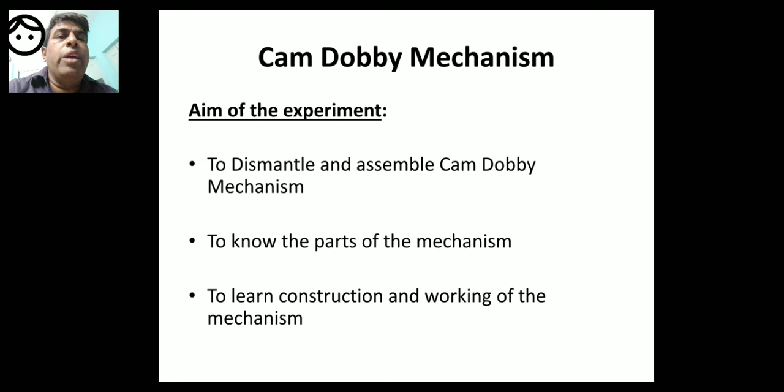So that is known as cam dobby mechanism. Dobby is a shedding device attached to loom to increase the designing capacity. The dobby normally controls 12 to 24 heald shafts. The dobbies are classified as negative, positive, single lift, double lift, crank driven, cam driven, etc.

So in the cam dobby mechanism, dobby is a shedding device attached to a loom, and as I already told, it is attached to the loom, over the loom frame. It is used to increase the designing capacity. The dobby normally controls 12 to 24 heald shafts. The dobbies are classified as negative, positive, single lift, double lift, crank driven, cam driven, etc.

So negative and positive dobbies I have told you already. Climax dobby is a negative dobby where either of the movements, lifting or lowering, is controlled by the dobby, then it is called negative dobby. If both the motions, lifting and lowering, are controlled by the dobby, then it is called positive dobby.

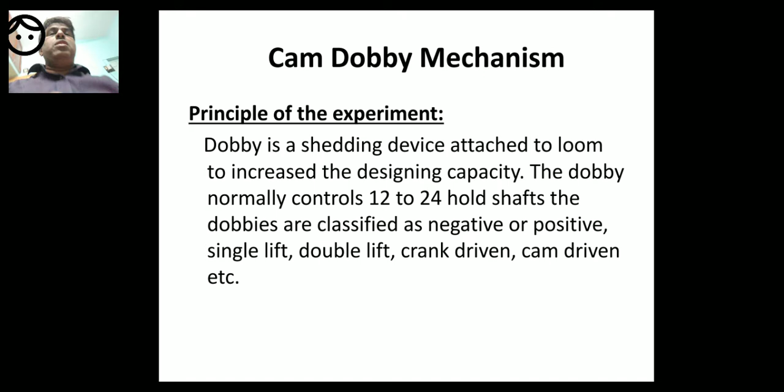Cam driven dobbies are driven by cams, as we are going to see in this diagram. The Ruti cam dobby is negative in action. The healds are lowered because of the spring in this dobby. The knives are pushed forward by the pair of cams. The knives will come back and always stay in contact with the cams because of the spring.

The knives will come back and always in contact with the cams because of the spring. Here dwell of about one third pick is achieved.

The selection of the hook are made by paper pattern instead of wooden pegs. So we have a lot of information in this slide.

The Ruti Cam Dobby is produced by the Ruti company, so it is called as Ruti Cam Dobby. It is negative in action. What does it mean by negative?

The healds are lowered because of the springs in the body, in the dobby. Because of the springs in the dobby, the healds are lowered. That's why it is called as negative in action.

The knives are pushed forward by the pair of cams. So the top knife and bottom knife are pushed forward by the pair of cams. There will be a pair of cams and they will be pushed by the pair of cams. That is another point.

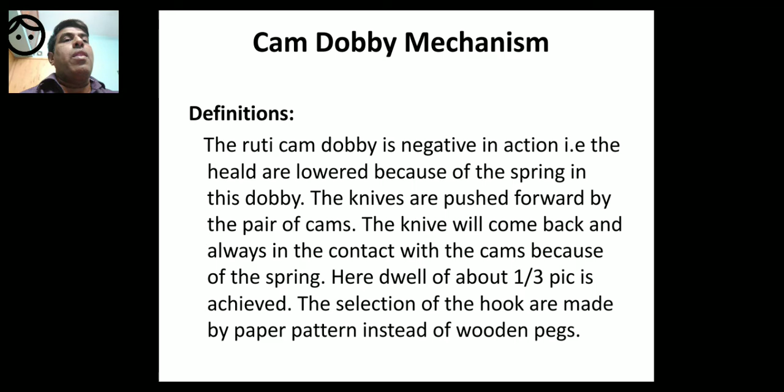So paper pattern is similar in functioning to wooden pegs and lags. So this is cam dobby.

So dear students, please see the diagram. A is the connecting lever, on the right hand side. B is the half lever.

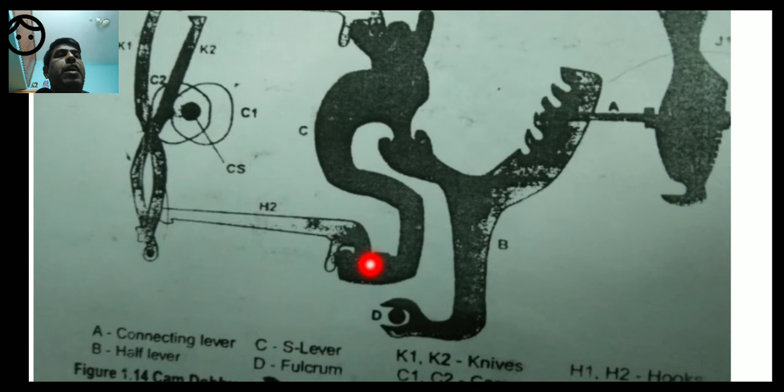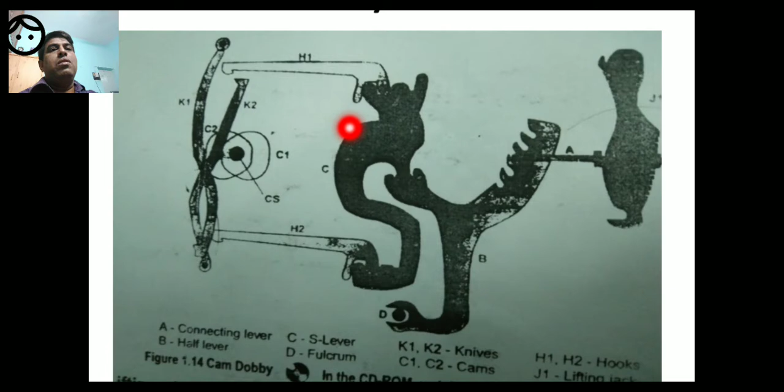C is the S lever. D is the fulcrum. K1, K2 are knives. C1, C2 are cams. H1, H2 are hooks.

This is H1 and the below one is H2, those are hooks, top hook and bottom hook. K1 and K2 are knives.

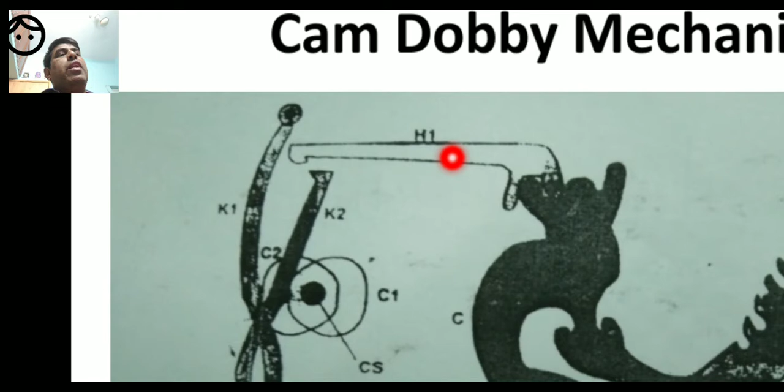So you see the cams, C1 and C2, both of them are cams, connected to bottom shaft. The cams will rotate and actuate the knives, and thereby hooks will come into action, and the motion is transmitted to the S lever and then to the...

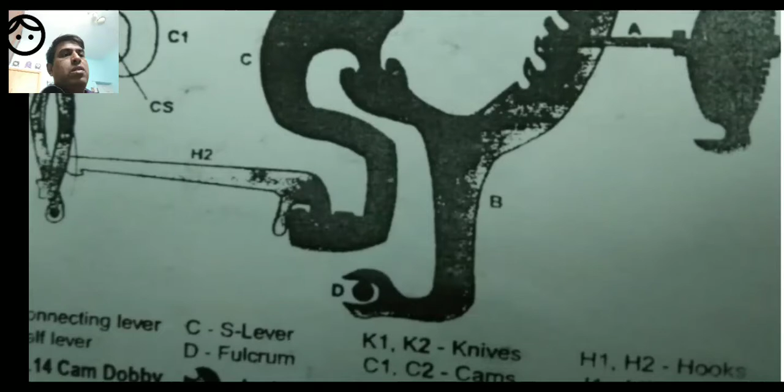What is this? B. So B is the half lever. Here he calls it as a half lever. The author calls it as a half lever.

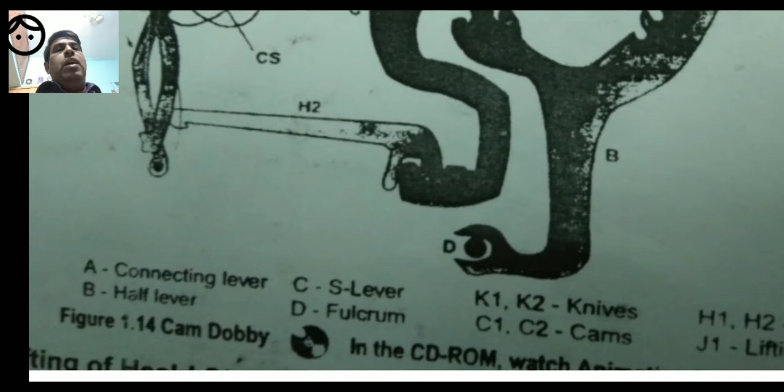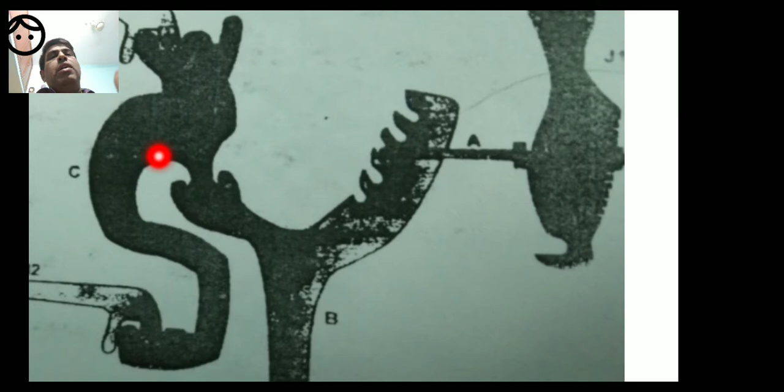So see the parts again. A is the connecting lever, B is the half lever, C is the S lever, and D is the fulcrum. K1, K2 are knives.

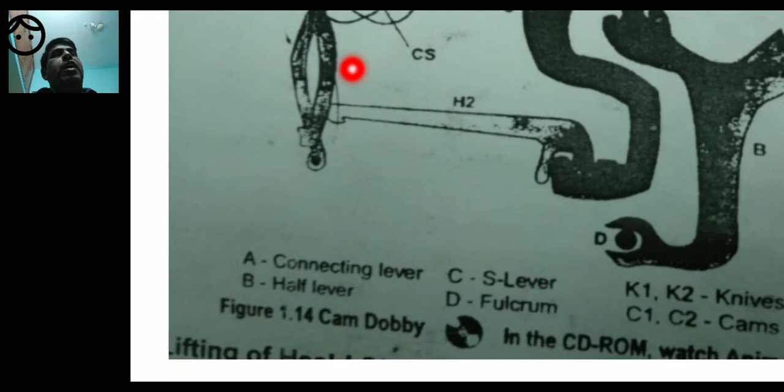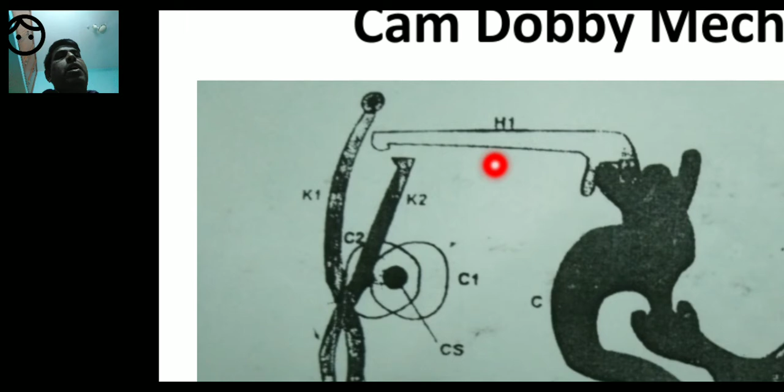C1, C2 are cams. K1, K2 are knives. These C1 and C2 are the two cams. H1 and H2 are two hooks. This is H2. So dear students, these are the parts of the mechanism.

Now we will go to construction of the cam dobby mechanism. Before going to the cam dobby mechanism, I will show you the video. As usual, the video will give you a very good understanding of the mechanism.

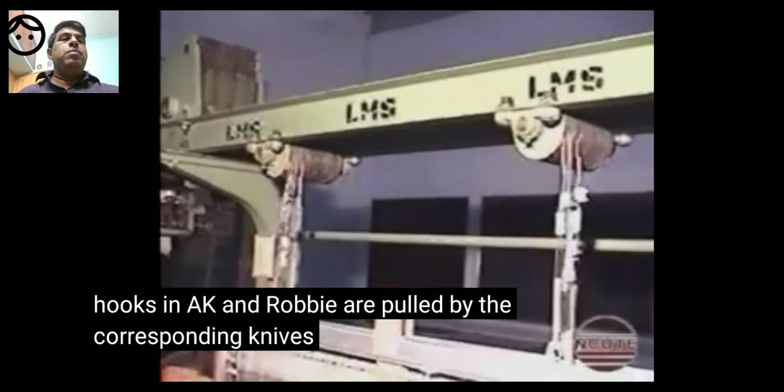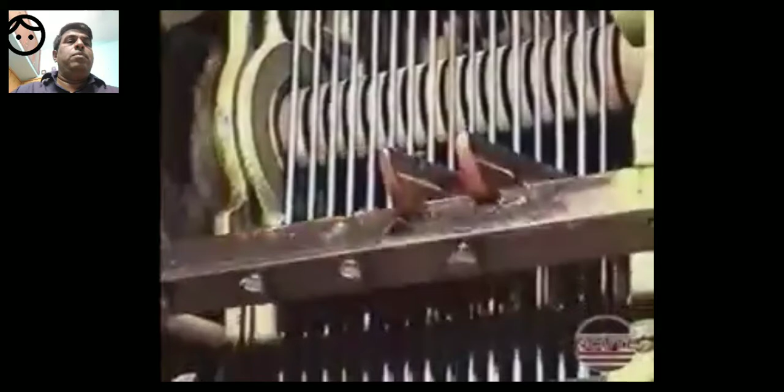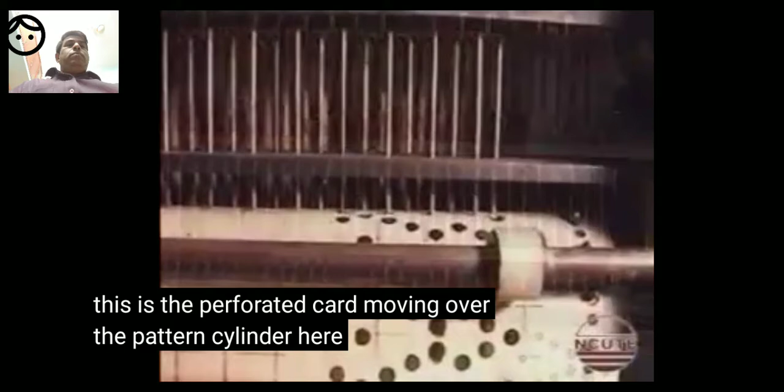In this video, we can see how selected hooks in a cam dobby are pulled by the corresponding knives. These are the top hooks and the top knives, and these are the bottom hooks and the bottom knives. This is the perforated card moving over the pattern cylinder. Here you can see the selection of short feelers and the action of deviating fingers.

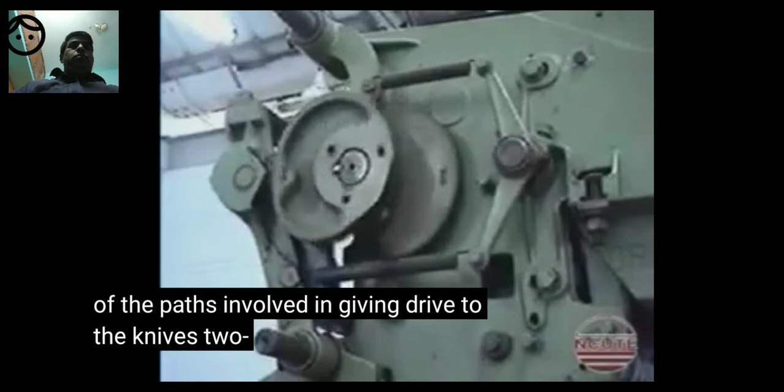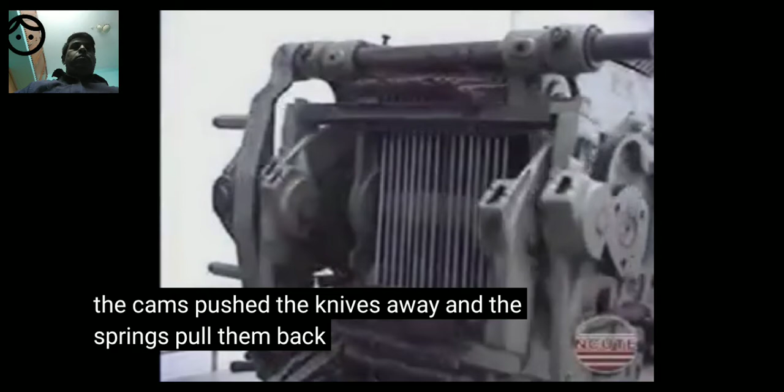This view shows the action of reciprocating lifting blocks. This is a complete view of the parts involved in giving drive to the knives. Two negative cams are seen driving their respective knives. The cams push the knives away and the springs pull them back. Again, we can see here the complete view of the action of the cams, knives, springs, and the pulling of the selected hooks.

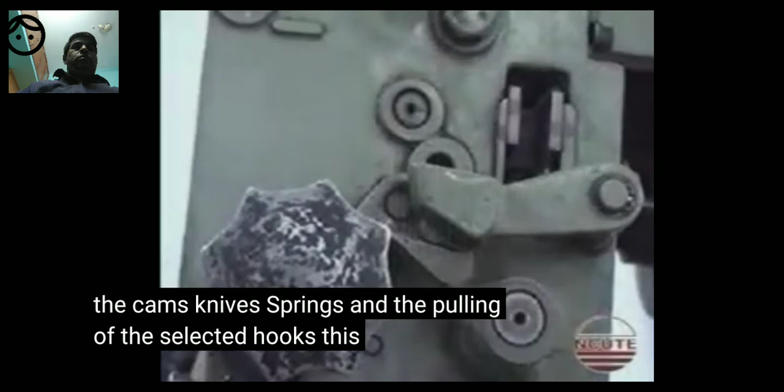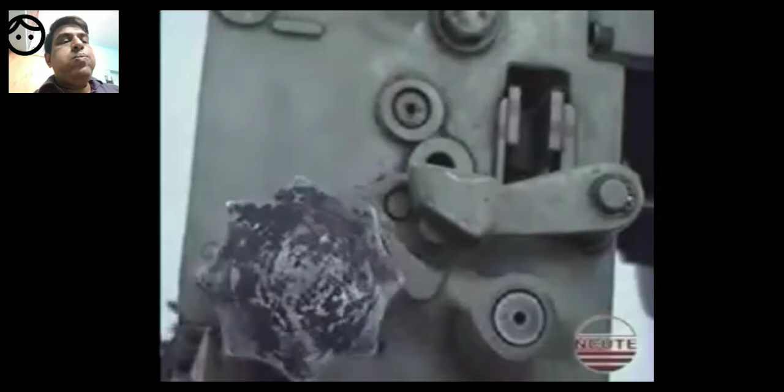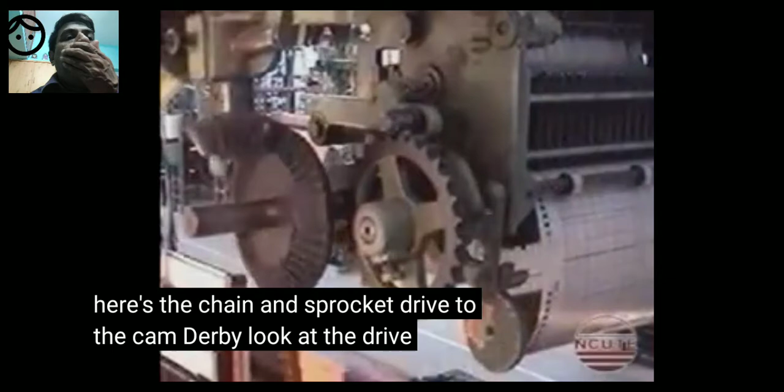This is the drive to the lifting blocks, which transfers the action to the hooks through the upright rods. Here is the chain and sprocket drive to the cam dobby. Look at the drive to the pattern cylinder. See the stud on the cam causing the throw in the sprocket to which the pattern drum is connected.

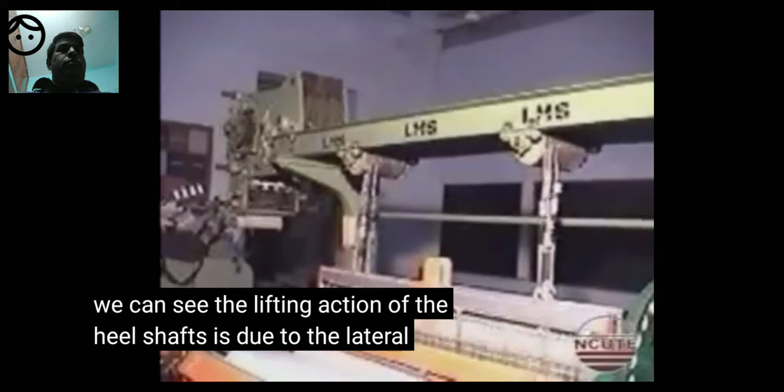Here we can see the lifting action of the heald shafts is due to the lateral movement of the lifting jack. The lowering of the heald shaft is by springs which cannot be seen in this view.

So dear students, you have seen it once. Now I will explain the diagram and the video. Please observe carefully.

In this video, we can see how selected hooks in a cam dobby are pulled by the corresponding knives.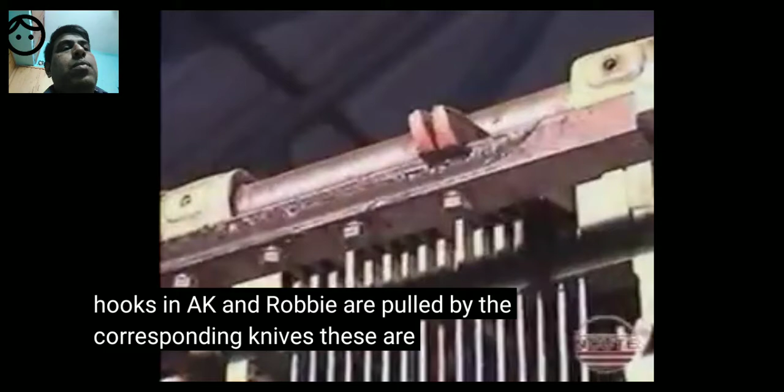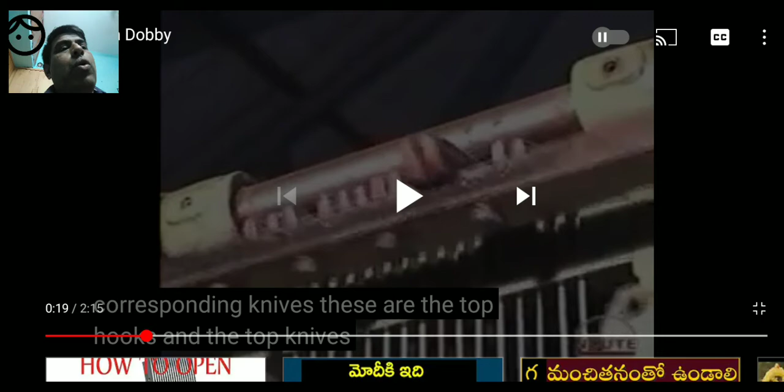These are the top hooks and the top knives. So you see top hooks and top knives above, and below are the bottom hooks. And these are the bottom hooks and bottom knives.

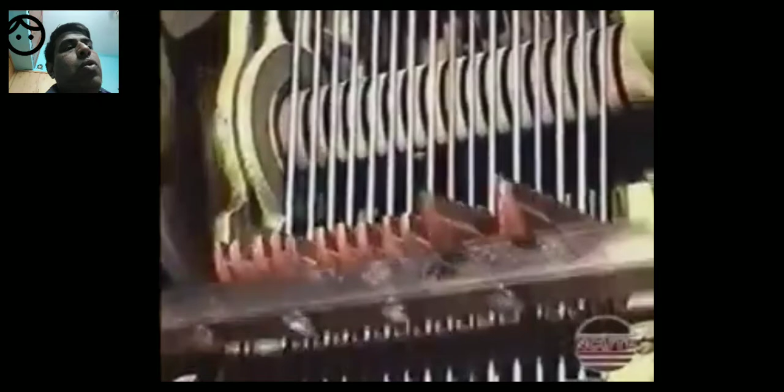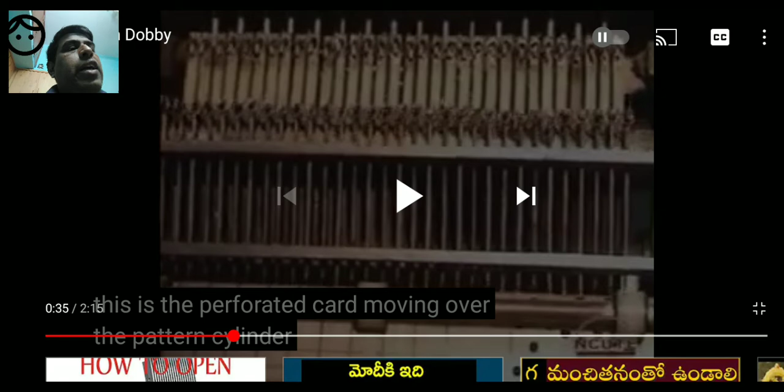This is the perforated card moving over the pattern cylinder. Here you can see the paper pattern, and small holes are present here.

These small holes are akin to pegs, and blank spaces are akin to holes in the wooden lags. So this is the comparison to wooden lags and pegs and holes in the paper pattern.

Simply, dear students, please remember, a peg is similar to a hole. A peg in the wooden lag is similar to a hole in the paper pattern.

So the wooden lags are replaced by the perforated card. Perforations means holes, so that is the perforated card. You can see it on the screen also, moving over the pattern cylinder. A peg in the wooden lag is similar to a hole in the perforated card or paper pattern which runs over the pattern cylinder.

Here you can see the selection of short feelers and the action of deviating fingers. So here you can see the feelers and fingers - there will be straight feeler and bent feeler, and fingers will be there. This view shows the action of reciprocating lifting blocks.

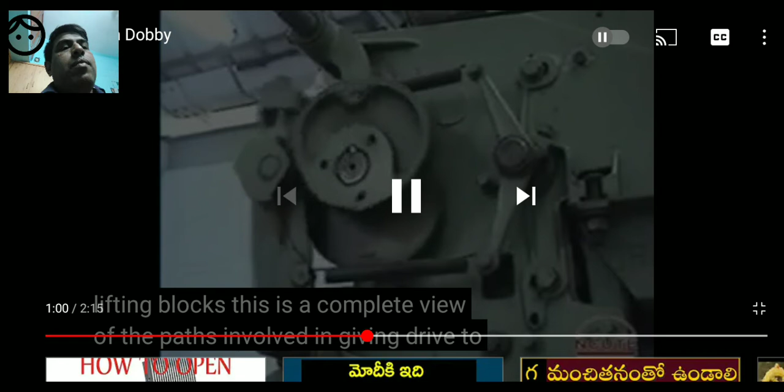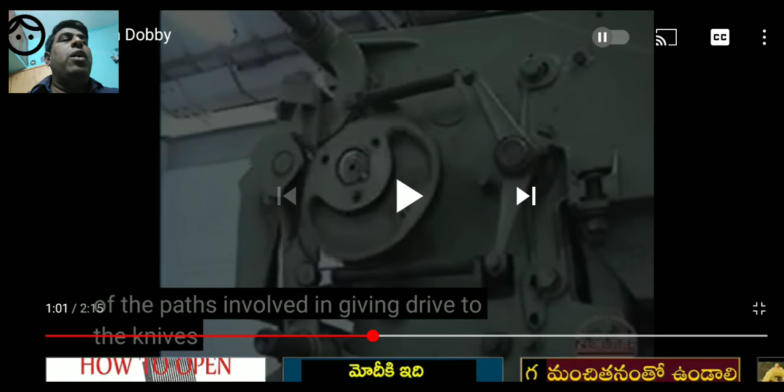Two negative cams are seen driving their respective knives. The cams push the knives away and the springs pull them back. The motion is transmitted to the hooks, then goes to the S lever and baulk lever you will see here, and from this it goes into the machinery parts which we cannot see in the video.

So this is the side view. You can see that there are two cams and two knives, and connected to them are hooks, and they are returned back by springs.

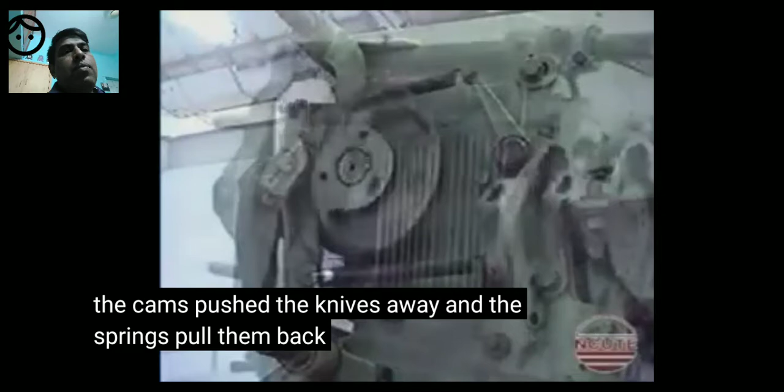Again we can see here the complete view of the action of the cams, knives, springs, and the pulling of the selected hooks. This is the drive to the lifting blocks, pulling of the selected hooks.

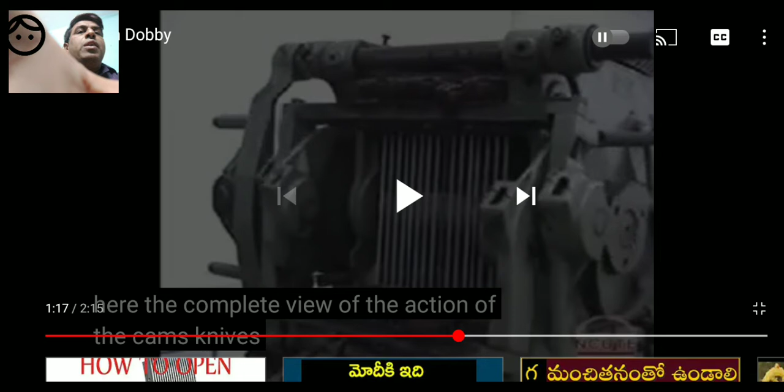So dear students, see here, the cams are rotating, top knife and bottom knife are rotating, and they are pulling the hooks. Top hook and bottom hooks are being pulled by the top knife and bottom knife. This is the front view - we have seen the side view, now we are seeing the front view, with springs and the pulling of the selected hooks.

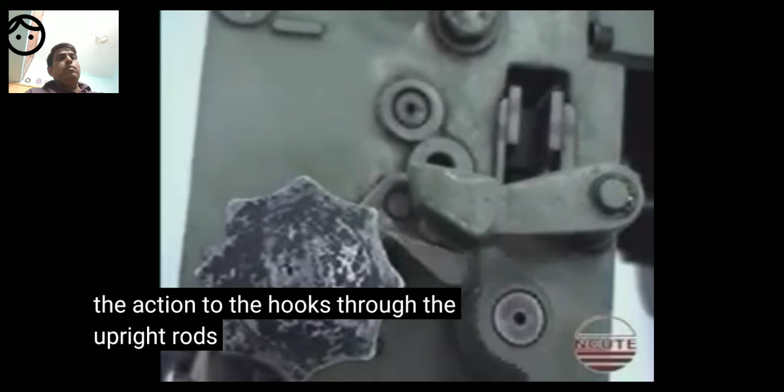This is the drive to the lifting blocks, which transfers the action to the hooks through the upright rods. Here the drive is given to the lifting blocks, meaning the lifting heald shafts.

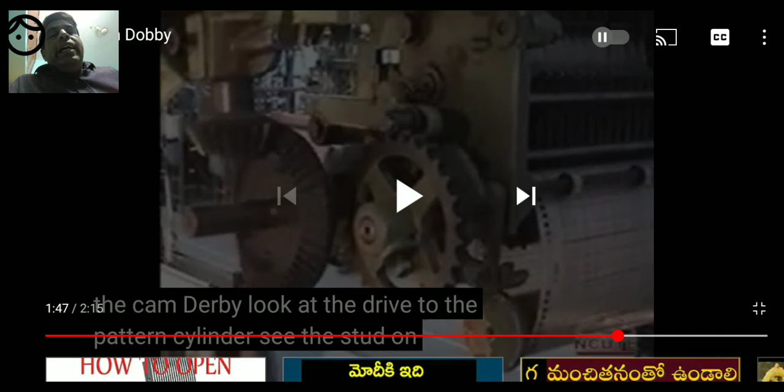Here is the chain and sprocket drive to the cam dobby. The drive comes here - look at the drive to the pattern cylinder, see the stud on this. So the drive to the pattern cylinder is different, and the drive to the cam dobby is different.

So the drive to the pattern cylinder is different, and the drive to the cam dobby is different. The cam causes the throw in the sprocket to which the pattern drum is connected. Here we can see the lifting action of the heald shafts is due to the lateral movement. The pattern drum, like the pattern cylinder, has a drum on which the paper pattern is rotating.

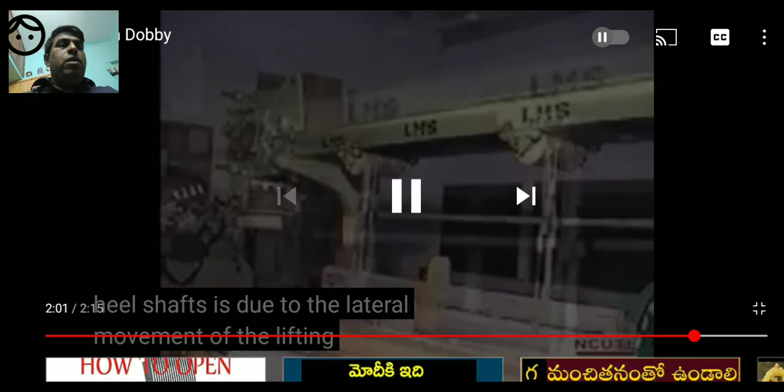Movement of the lifting jack. The lowering of the heald shaft is by springs which cannot be seen in this view. So the lifting of the heald shafts takes place, and here you see the notes - springs which cannot be seen in the view. What will they do?

They will make the negative action. What does it mean by negative action? The lowering of the heald shafts - no, wait - is done by the springs.

So in this way, one movement - lifting of the heald shafts is done by the cams, and lowering of the heald shafts is done by the springs. Therefore it is called negative action, and that's why it is called a negative cam dobby.

Now I have explained all these things. Now clearly observe all the parts.

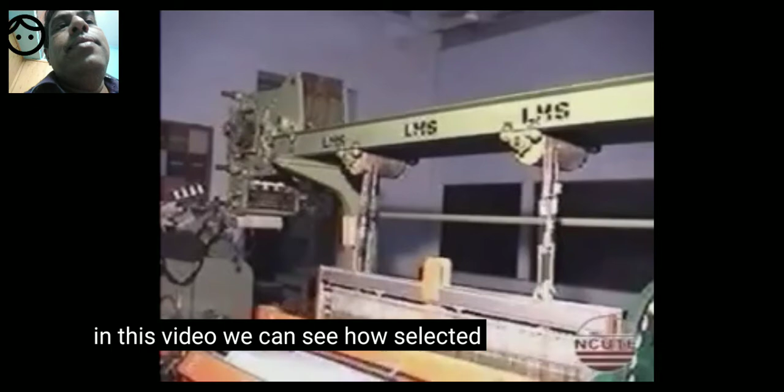In this video, we can see how selected hooks in a cam dobby are pulled by the corresponding knives. These are the top hooks and top knives, and these are the bottom hooks and bottom knives.

This is the perforated card moving over the pattern cylinder.

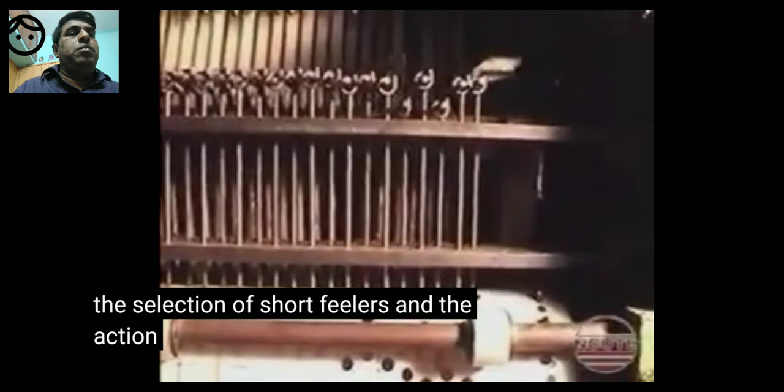Here you can see the selection of short feelers and the action of deviating fingers. This view shows the action of reciprocating lifting blocks.

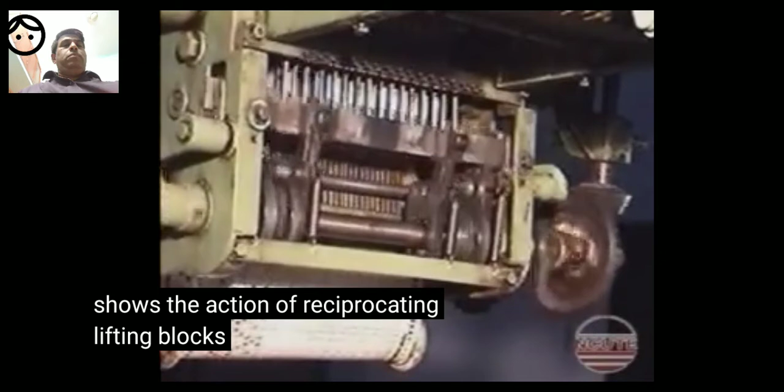This is a complete view of the parts involved in giving drive to the knives. Two negative cams are seen driving their respective knives. The cams push the knives away and the springs pull them back.

Again, we can see here the complete view of the action of the cams, knives, springs, and the pulling of the selected hooks.

This is the drive to the lifting blocks, which transfers the action to the hooks through the upright rods.

Here is the chain and sprocket drive to the cam dobby.

Look at the drive to the pattern cylinder. See the stud on the cam causing the throw in the sprocket to which the pattern drum is connected.

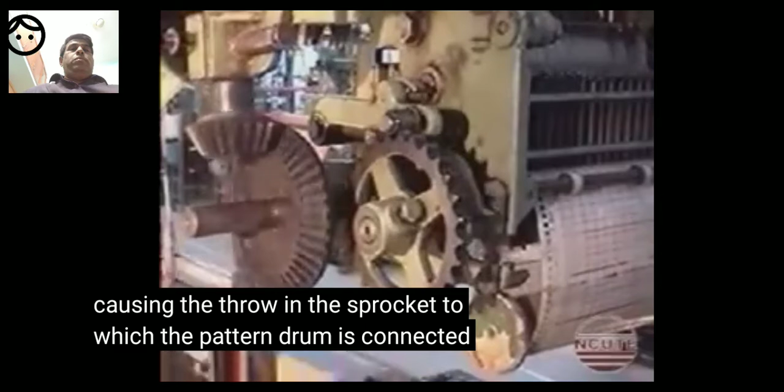Here we can see the lifting action of the heald shafts is due to the lateral movement of the lifting jack. The lowering of the heald shaft is by springs, which cannot be seen in this view.

So dear students, please see this, how simple now it is for you to understand. Cams are there, C1, C2 are cams.

K1, K2 are knives, top knife and bottom knife. H1, H2 are hooks. So knives are only two, but hooks are number of hooks.

So depending on the draft of the design, K1, K2 knives are returned to their original position by the action of the springs.

And hooks are connected to S lever and then to the half lever and then to the lifting jack.

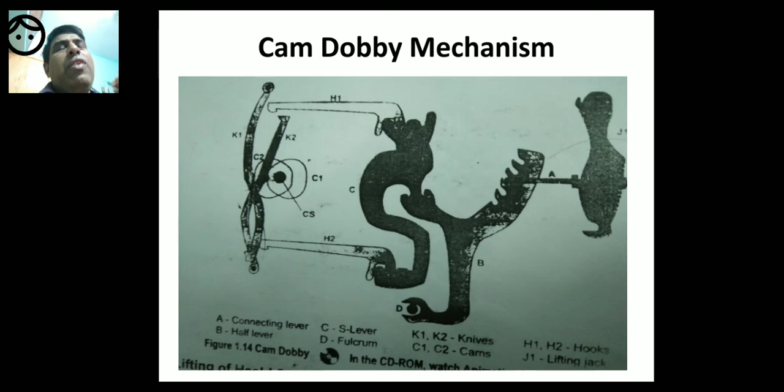So this is that's what we have just seen in the video. Now you might have very clearly understood. Now it is very simple for you to understand.

So now we will go to the notes and explanation slide by slide. So, construction.

Until recently, it was customary to actuate the knives of Dobby systems by means of a crank mounted at the end of the bottom shaft.

So till recent times, the knives of Dobby systems are actuated by a crank mounted at the bottom shaft. So on the bottom shaft there is a crank mounted, and the crank mounted will actuate the knives till recently.

Second point: this produces an approximately simple harmonic motion. So with the crank it produces simple harmonic motion with no possibility of introducing a planned period of dwell.

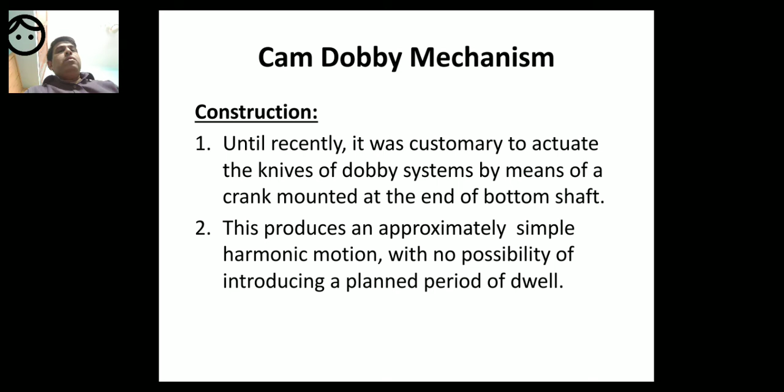So there is no planned period of dwell in this crank driven thing.

So construction, third point: the more recent trend. So I have already told you there are two types, one kind of classification of Dobbies is crank driven and cam driven.

So the first two points dealt with the disadvantages of crank driving, and now we are entering into the third point, which is introducing cams.

The more recent trend is to actuate the knives by means of cams mounted on a shaft in the Dobby system, the shaft being driven by a set of bevel gears or by a chain and sprocket arrangement attached to the crankshaft.

So dear students, the third point talks about the more recent trend. The first two points talked about crank driving, and now, as you have seen in the video and in the picture, the knives are moved or actuated by means of cams.

So where these cams are mounted, they are mounted on a shaft in the Dobby system. So how is the shaft driven? It is driven by a chain and sprocket arrangement or bevel gears.

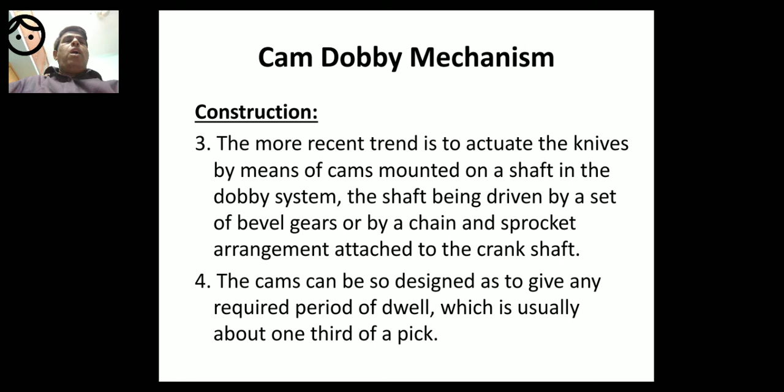So how is a cam driven? The cam is driven by a set of bevel gears or a chain and sprocket arrangement.

Fourth point: the cams can be so designed as to give any required period of dwell, which is usually about one-third of a pick.

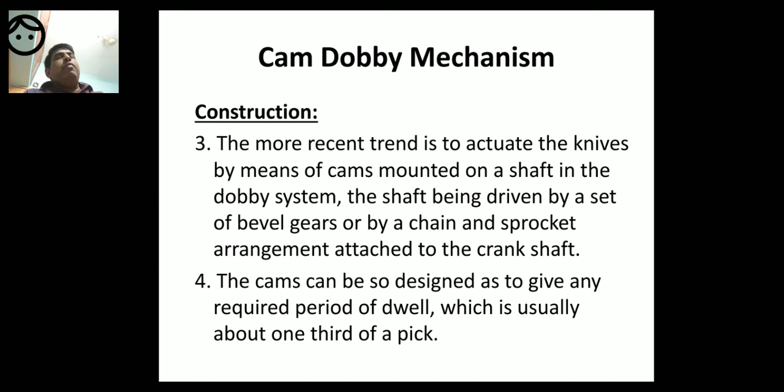Cam Dobby systems were originally introduced for weaving continuous filament yarn. Why are these cam Dobby systems produced? They are introduced for weaving continuous filament yarn, for which a period of dwell is particularly desirable in order to minimize abrasion and filamentation of warp by the shuttle.

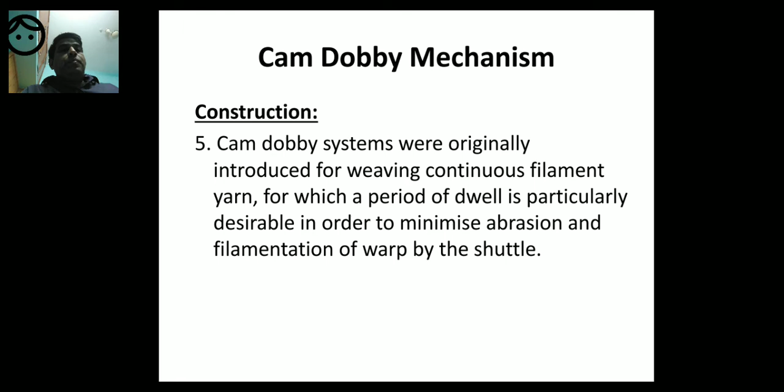This is the fifth point, and we have completed construction. Now coming to working in this Dobby. You have already seen the working, but since you have to write the notes, I will just go through them.

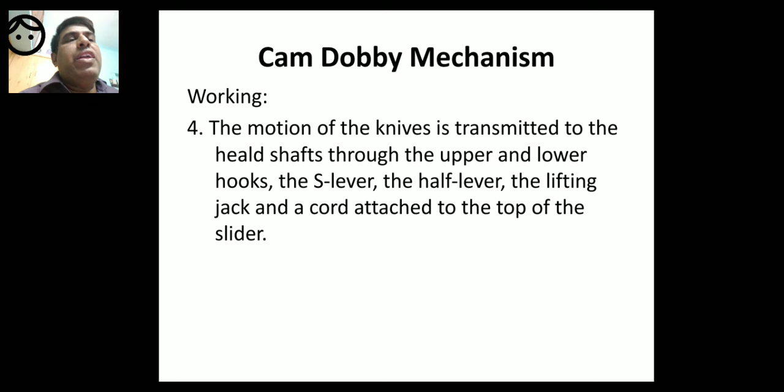The motion of the knives is transmitted to the heald shafts through the upper and lower hooks, the S lever, a half lever and lifting jack, and a cord attached to the top of the slider. So how is it transmitted to the heald shafts? It is transmitted through the upper hooks and lower hooks, and S lever and half lever, and then the half lever is connected to the lifting jack. The lifting jacks are connected, and therefore it is working. This is known as working.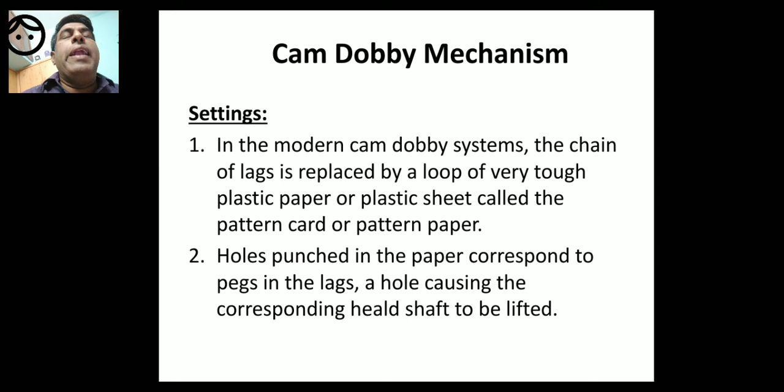Advantages of cam dobby. So you have seen the settings: the chain of wooden lags and pegs is replaced by a tough plastic sheet known as pattern card or paper pattern. The second point is a hole in the paper pattern causes the corresponding heald shaft to be lifted, and a hole in the paper pattern is equal to the peg in the wooden lags. Light feelers are used to detect the presence or absence of a hole, but they do not supply the force required to lift the hooks.

Now we are coming to advantages of cam dobby. They work with much less vibration than those in a climax dobby. In the climax dobby there will be a lot of vibration and a lot of moving parts, and a lot of friction, but here there is much less vibration. Next, the dobby is placed on one side of the loom and hence allows maximum light on the fabric.

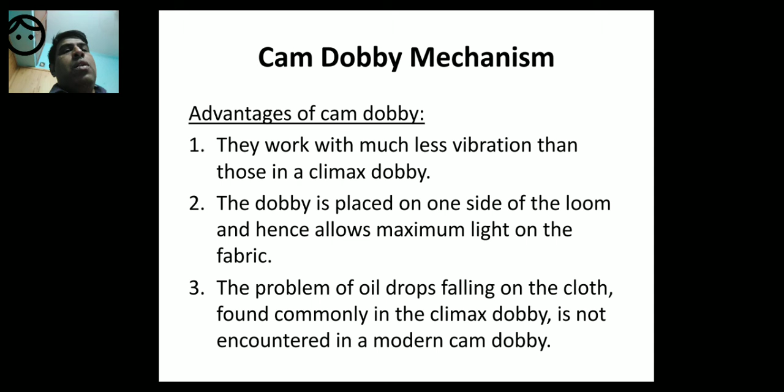So the problem of oil drops falling on the cloth, commonly found in the climax dobby, is not encountered in a modern cam dobby. In the climax dobby there will be oil drops falling on the cloth, but in the cam dobby this problem is not encountered. So the problem of oil drops is removed.

Fourth point: in modern cam dobby systems, the drive is derived from the crankshaft by a chain sprocket or bevel and bevel wheel combination, an arrangement that makes for smooth running. So the drive comes from bevel gears, meaning the bevel and bevel wheel combination, which is known as bevel gears.

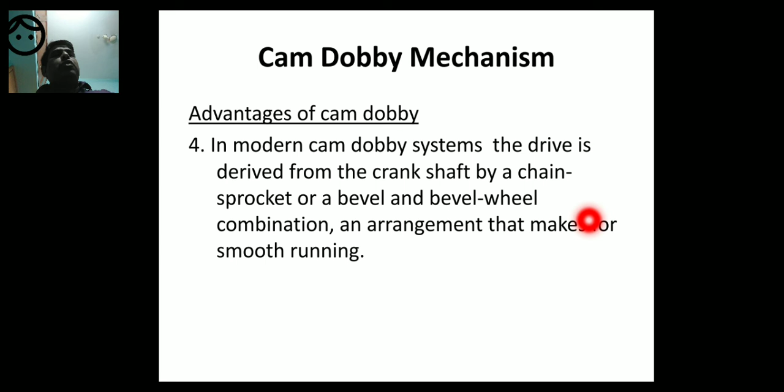So bevel and bevel wheel combination is known as bevel gears. What are bevel gears? Bevel and bevel wheel - an arrangement that makes for smooth running of the machine.

Modern cam dobby systems are provided with a heald-levelling attachment, by means of which all the heald shafts can be brought to the same level for piecing up.

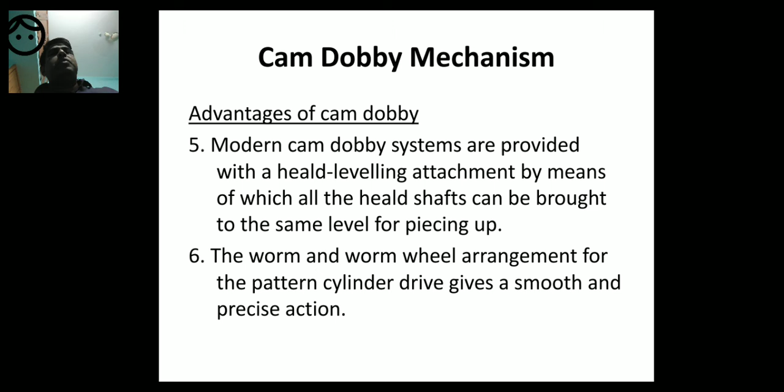The worm and worm wheel arrangement for the pattern cylinder drive gives a smooth and precise action. So this is how the pattern cylinder drive comes about.

Modern cam dobby systems have a mechanism of operating the heald shaft using an endless paper roll instead of wooden pegs and lags. If it is a very large design, a large number of wooden lags and pegs are required for the working of the dobby - that's why a bulky length of the pattern chain, made of wooden lags and pegs, is thus avoided.

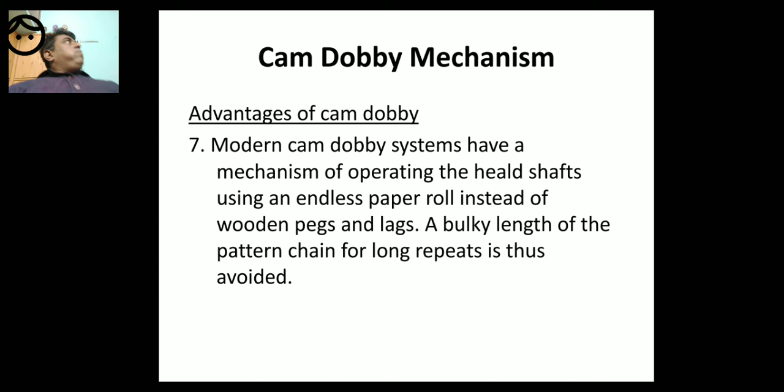So if the bulky pattern chain is avoided, what is used instead? Instead of the bulky length of the pattern chain, there is a paper roll - a tough plastic paper sheet, known as pattern card or paper pattern. So modern cam dobby systems have a mechanism of operating the heald shafts using an endless paper roll instead of wooden pegs and lags.

Eighth point: paper rolls that have been used once can be stored and reused if required, a feature that is practically impossible in a climax dobby in which a lattice with lags and pegs are used.

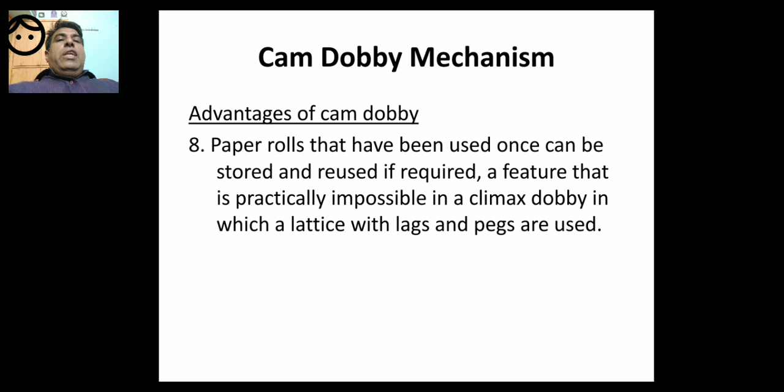So what is a paper roll? The tough plastic paper is easy to store - it can be stored anywhere and reused. This is not possible with wooden lags and pegs because they are very bulky. So paper rolls, once used, can be stored and reused, whereas wooden lags and pegs cannot be stored easily and are not reusable.

Now see the video again and then we will conclude the class.

In this video, we can see how selected hooks in a cam dobby are pulled by the corresponding knives. These are the top hooks and top knives, and these are the bottom hooks and bottom knives.

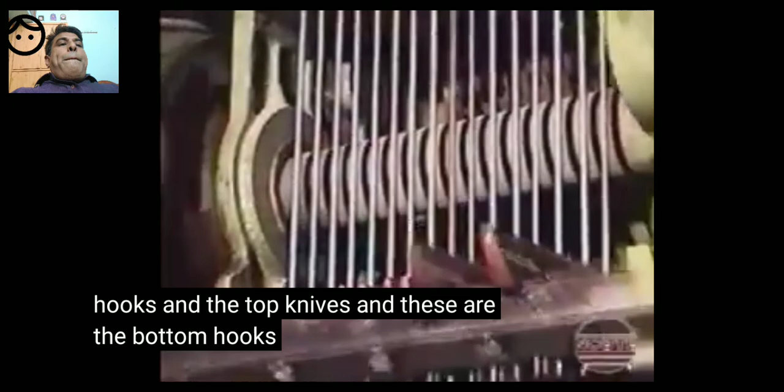This is the perforated card moving over the pattern cylinder. Here you can see the selection of short feelers and the action of deviating fingers. This view shows the action of reciprocating lifting blocks.

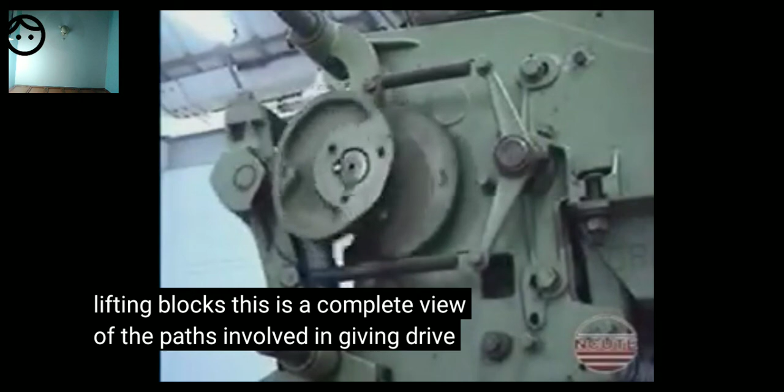This is a complete view of the parts involved in giving drive to the knives. Two negative cams are seen driving their respective knives - the cams push the knives away and the springs pull them back. Again we can see the complete view of the action of the cams, knives, springs, and the pulling of the selected hooks.

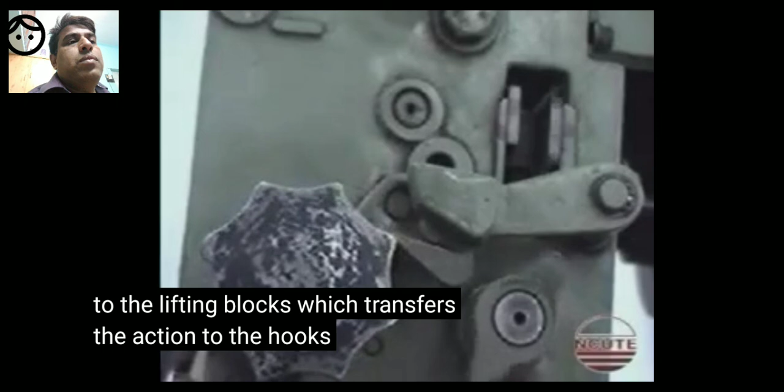This is the drive to the lifting blocks, which transfers the action to the hooks through the upright rods. Here is the chain and sprocket drive to the cam dobby. Look at the drive to the pattern cylinder - see the stud on the cam causing the throw in the sprocket to which the pattern drum is connected.

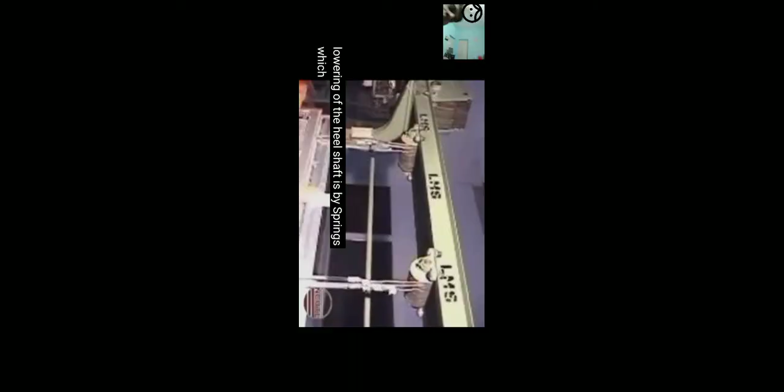Here we can see the lifting action of the heald shafts is due to the lateral movement of the lifting jack. The lowering of the heald shaft is by springs, which cannot be seen in this view.